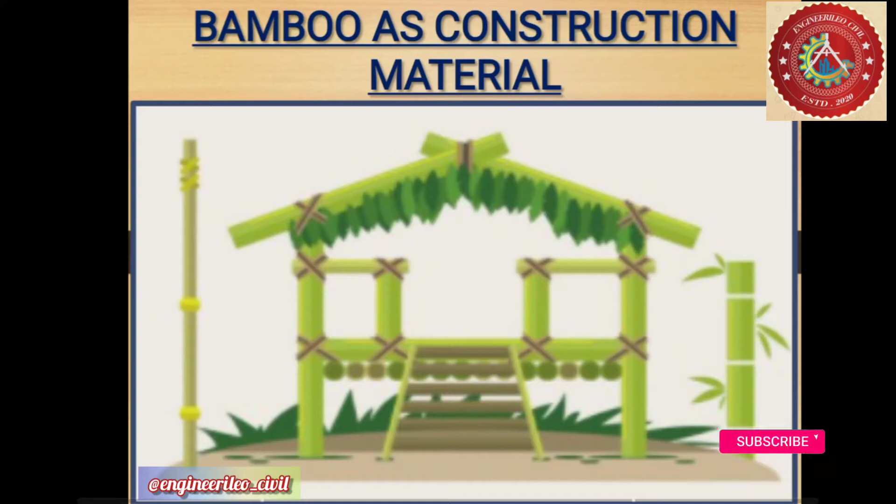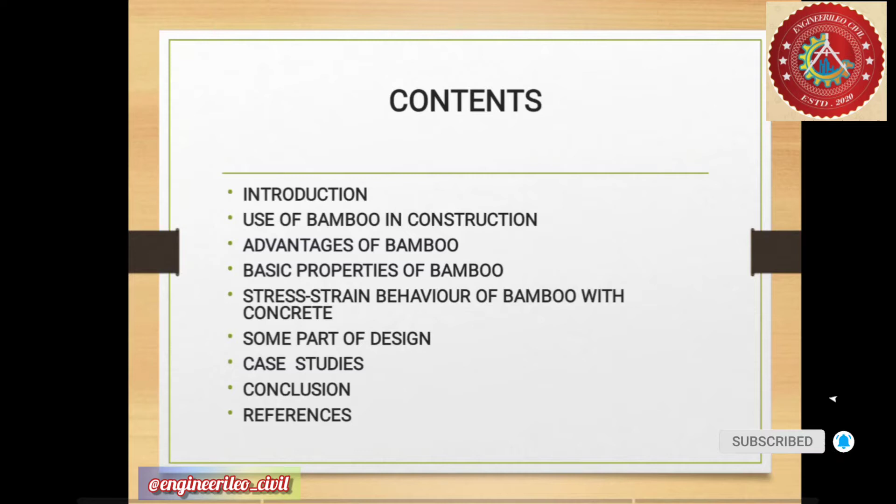So today's seminar topic, mini project topic, is bamboo as a construction material. We can use bamboo in our construction. There are many uses of bamboo, many advantages of bamboo, properties of bamboo. We'll learn about the stress strain behavior of bamboo with concrete, if we add concrete as well as bamboo in our construction. We'll see some part of design case studies, and finally we'll give the conclusion and the references from where we made this ppt.

Okay, so let's start with the introduction. Bamboo is a woody grass. It is the fastest growing woody plant in the world. Some species of bamboo grow so fast that you can almost see them growing. Bamboos are some of the fastest growing plants in the world. They are capable of growing 60 centimeters or more per day. However, the growth rate is dependent on local soil and climatic conditions.

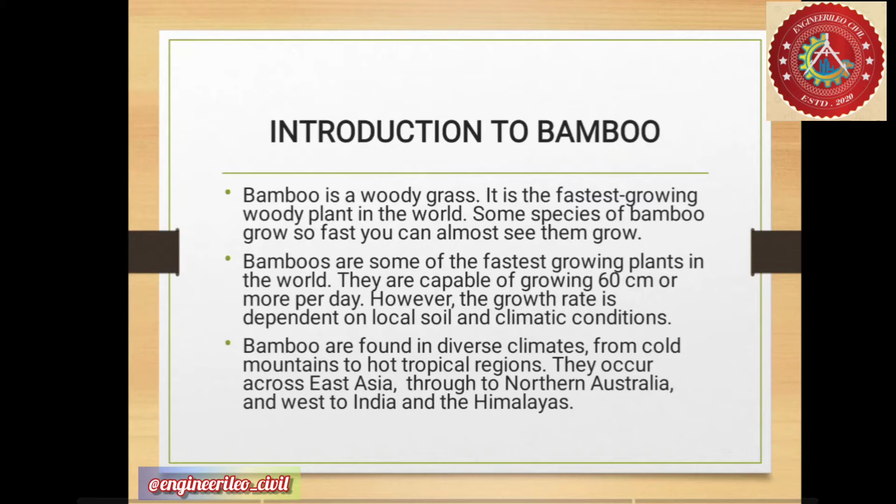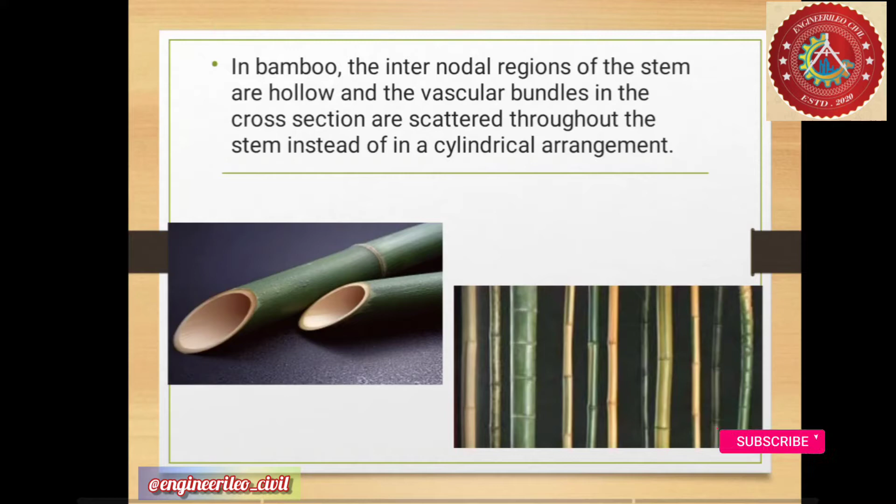Here you can see the bamboo resources in India. In the map, the dotted portions are the resources with different shapes. The triangles are the bamboos, and rectangles are the Dendrocalamus, Indocalamus, and so on. You can see it in Google also. The major bamboo growing states in India are the Northeast, Madhya Pradesh, Maharashtra, Orissa, Karnataka, Jharkhand, Kerala, UP, West Bengal. 45% of bamboo forest is in India, with 4.5 million tons produced annually from 8.96 million hectares.

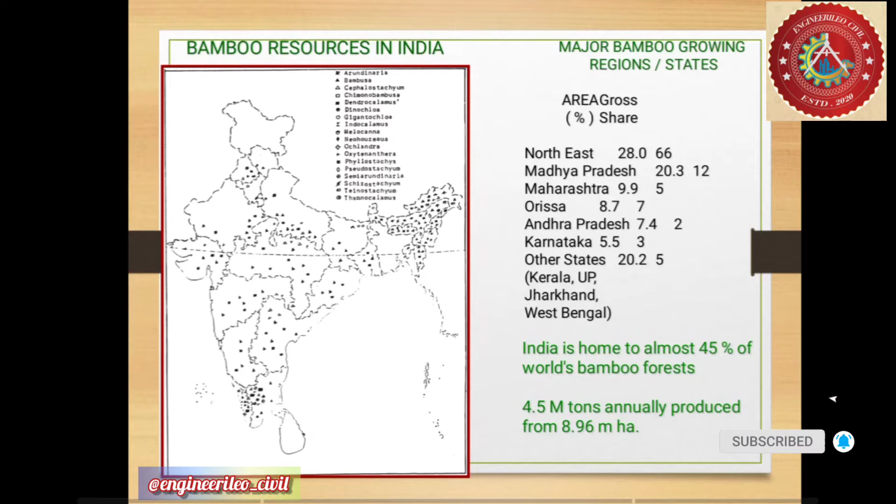Okay, so let's study the advantages of using bamboo. Some of the advantages are they are low cost, environmentally friendly, lightweight compared to steel, shock absorbing and earthquake resistant, use less fossil fuel, and prevent pollution by absorbing large amounts of nitrogen from wastewater and reducing the amount of carbon dioxide in air. And in tropical and subtropical regions, it is an abundant and economically advantageous material.

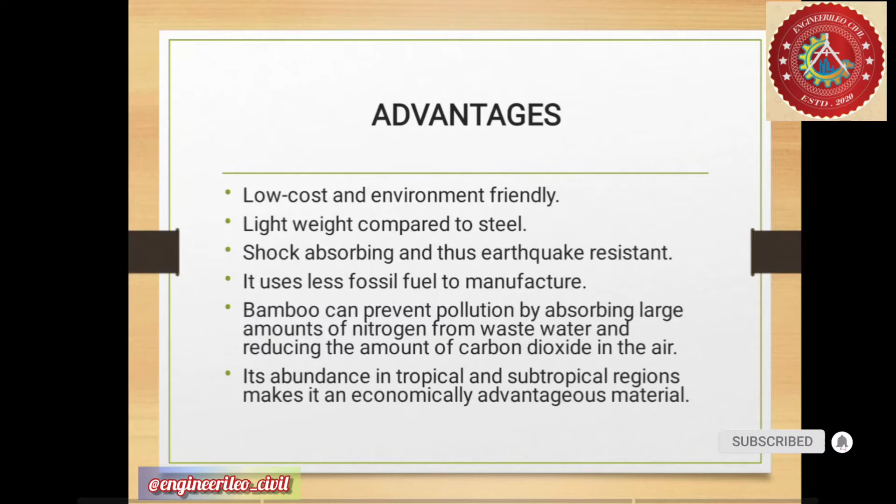Now we'll study the use of bamboo in construction. One use is in scaffolding. Do you know what scaffolding is? The arrangement made to construct slabs or for painting purposes. Bamboo is very essential and very economical for this. For reinforcement, we provide reinforcement bars in concrete columns. You can provide bamboo bars by filling the hollow surface with concrete.

For roofing purposes, you can see in village areas the bamboo is cut from the middle and the semicircular parts are kept as roofing. You can also construct walls, the partition walls, through bamboo. Doors and windows were constructed from bamboo in earlier ages.

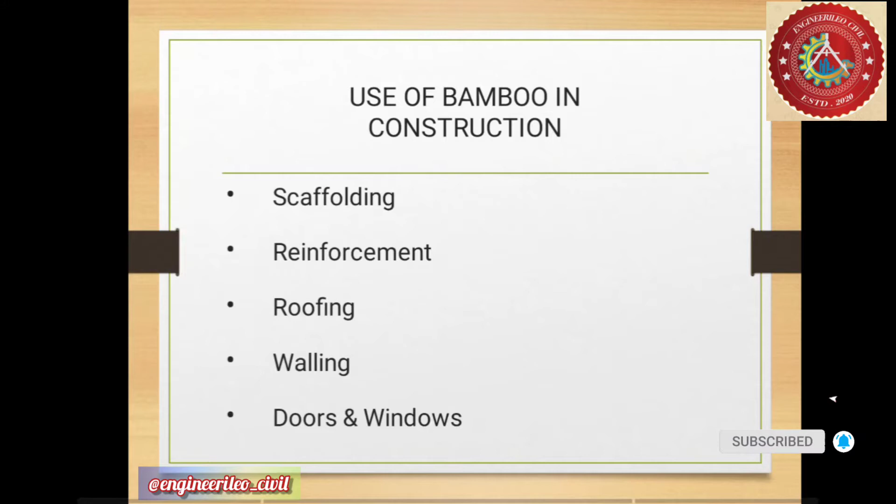So we'll study the basic properties of bamboo. First of all, we'll see the tensile strength and unit weight. The common tensile stress in steel reinforcement is 160 Newton per mm square, and that in bamboo is 370 Newton per mm square. Comparatively, the tensile stress is more in bamboo as compared to steel. The mass per volume of steel is 7850 kg per meter cube, whereas for bamboo it is 500 to 600 kg per meter cube. You can see that bamboo is much cheaper, much lighter, with far less weight than steel and more tensile strength.

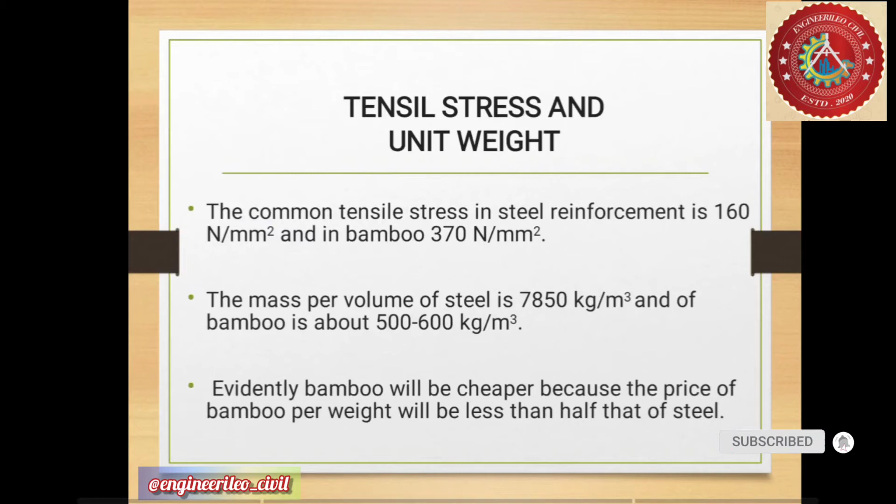Now we'll see the modulus of elasticity of bamboo. The fibers in bamboo act as reinforcement, similar to reinforcing steel bars. Distribution of fibers increases from inside to outside. The elastic modulus for cellulose is 70,000 Newton per mm square, and about 50% of the cross section of fiber is cellulose. So the elastic modulus of fiber is 35,000 Newton per mm square. In most bamboos, fibers constitute 60% on the outside and 10% on the inside.

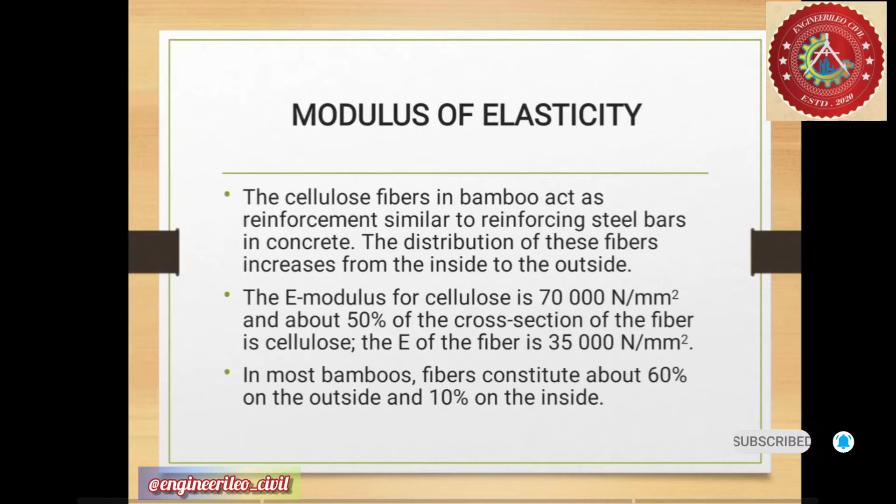The density of fibers in the cross section of a bamboo shell varies along its thickness. This presents a functionally gradient material evolved according to the state of stress distribution in its natural environment. You can see the diagram. The fibers are concentrated in regions closer to the outer skin.

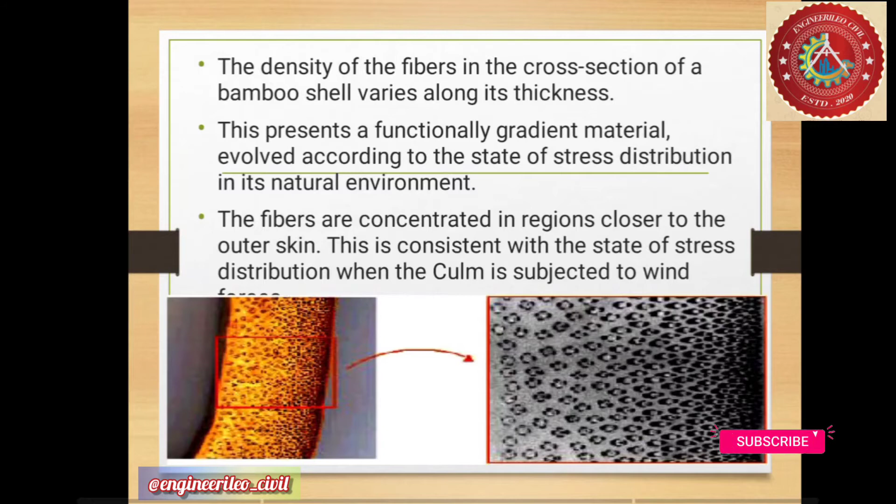This is consistent with the state of stress distribution when the culm is subjected to wind forces. Now we'll see some of the durability part of bamboo. Bamboo with low humidity is less prone to mold attacks, especially when humidity content is less than 15%. You may see that during construction of bamboo, there might be attack of fungus or something else, because it's a wood material, it's a plant material, right?

So physical and mechanical properties of bamboo increase with the decrease in humidity content, and bamboo to be treated with preservative needs to be dry to facilitate penetration. Because of the action of water or humidity, there might be attack of fungus, so we have to keep the bamboo in dry state. Bamboo can be dried in air, greenhouse, and oven, or by fire.

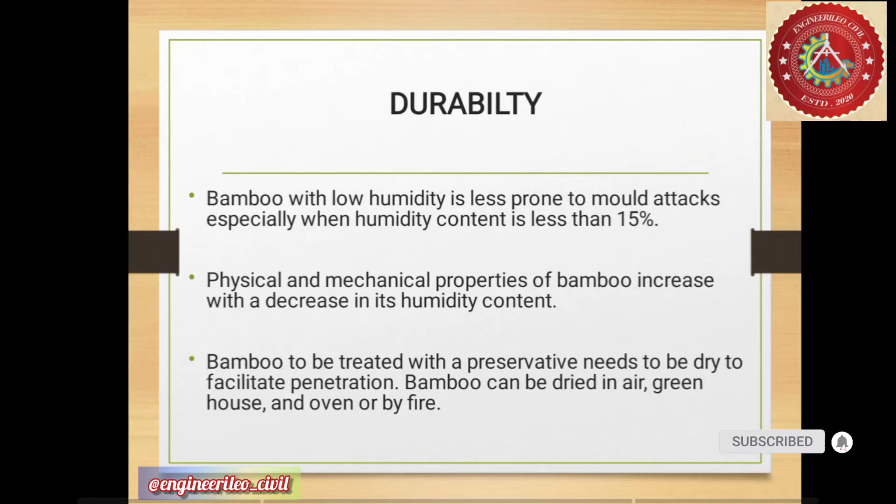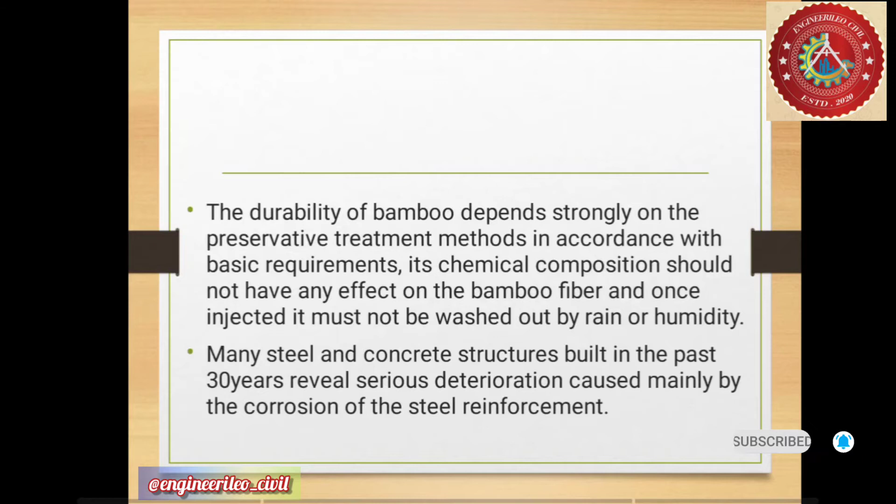It could be dried. Okay, the many steel and concrete structures built in the past 30 years reveal serious deterioration caused because of corrosion of steel reinforcement. That's why bamboo is more preferable. So we'll study about the process of preservation of bamboo. According to IS 401-2001 Code of Practice of Preservation of Timber, first is the surface application.

What we do in surface application, we'll brush it, we'll dip it in some paint or grease, such that because of water, the fungus could not attack it. Like hot and cold method, diffusion process, internodal injection, whatever.

So here in that process, first is the tank containing preservative located at high level. Second, the tank connecting the pipework. Third, the pipework has been distributed in various parts. Fourth, the different pipes or the sub pipes are controlled by the valve and with the tube clamp, and then with the help of flexible rubber tubing, the bamboos are wax plugged. Okay.

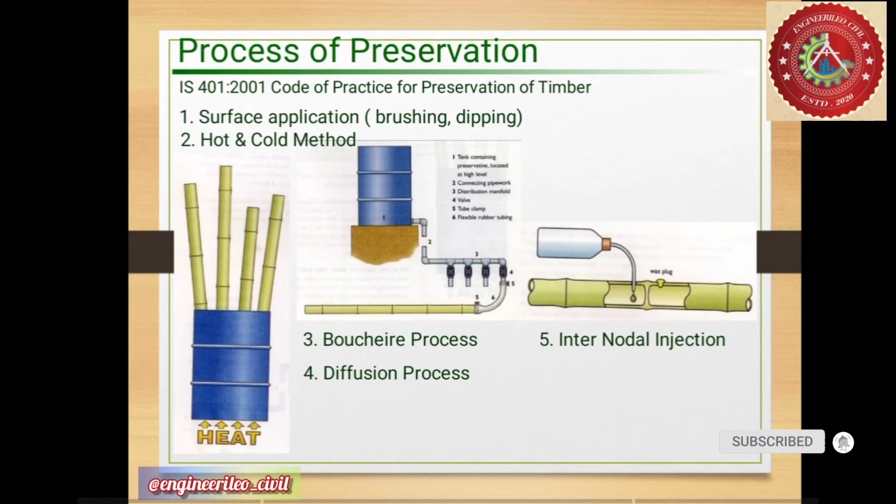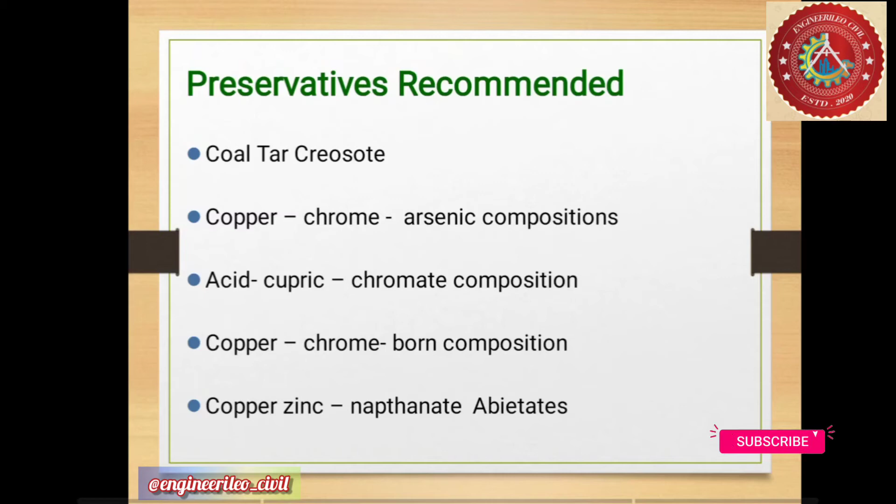So now we'll see the preservatives recommendations. We can add preservatives where you dip preservatives like coal tar or copper chrome, acid cupric, copper chrome boron composition, copper chrome arsenic composition, copper zinc naphthenate. Okay, here you can see the table of physical and mechanical properties of Indian bamboos.

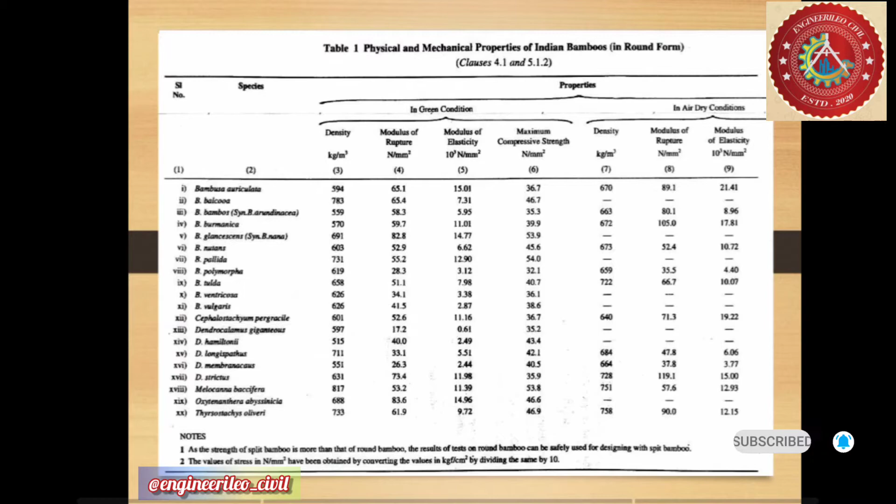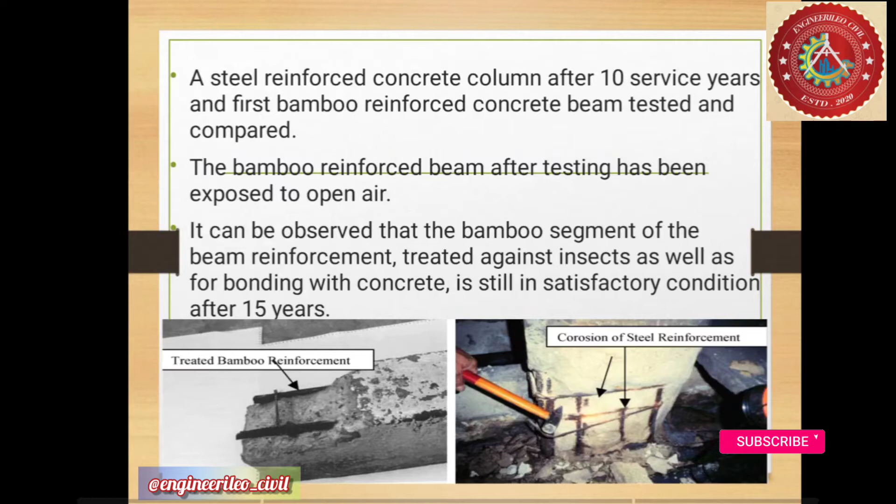In that diagram, you can see that a steel reinforced concrete column after 10 service years and a bamboo reinforced beam after being tested are compared. Okay, right. So you can see the diagram comparison. Now we'll learn about the earthquake resistance part.

As said earlier, bamboo is a perfect material for earthquakes. Its lightweight and hollow form gives much stiffness. But some can ask how to assess whether a bamboo house would survive an earthquake of a given intensity. But for that, a dynamic test on a full scale house is extremely expensive. So at the National Bamboo Project of Costa Rica, only typical walls are tested using a static test.

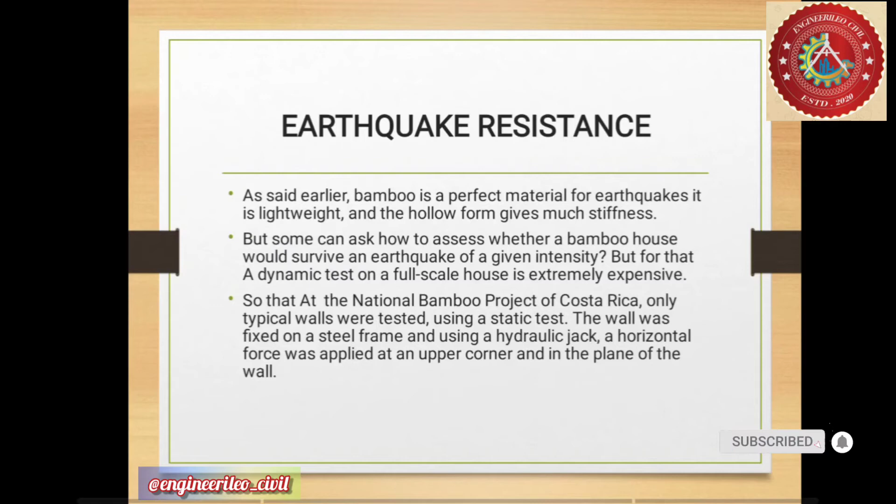A wall was fixed on a steel frame and using a hydraulic jack, a horizontal force was applied at the upper corner and in the plane of the wall. Right? Here you can see the diagram of that thing. A panel made of split bamboo. The hydraulic jack, which applies horizontal force, can be seen at the top right corner of the frame. This jack simulates the effect of earthquake.

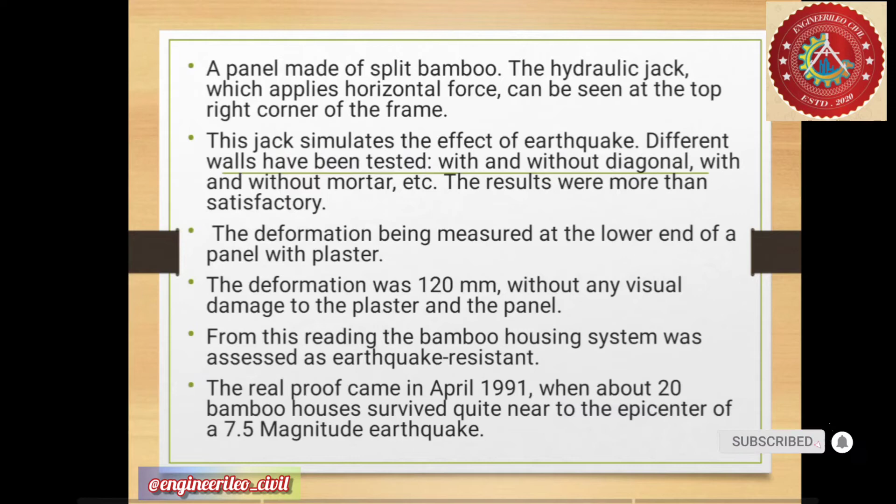Different walls have been tested with or without diagonal, with or without mortar, or any other cases. The results were more than satisfactory. The deformation was measured at the lower end of a panel with plaster. The deformation was 120 mm without any visual damage of the plaster panel. From this reading, the bamboo housing system was assessed for earthquake resistance. The real proof came in April 1991 when about 20 bamboo houses survived a nearby 7.5 magnitude earthquake.

Now we'll study about seismic reinforcement. The most important factor for the improved seismic performance of adobe construction is to provide reinforcement for walls. The role of reinforcement therefore is to keep these large pieces of adobe wall together. The ring beam must be strong, continuous and well tied to the walls, and it must receive and support the roof. The ring beam can be made of concrete or timber.

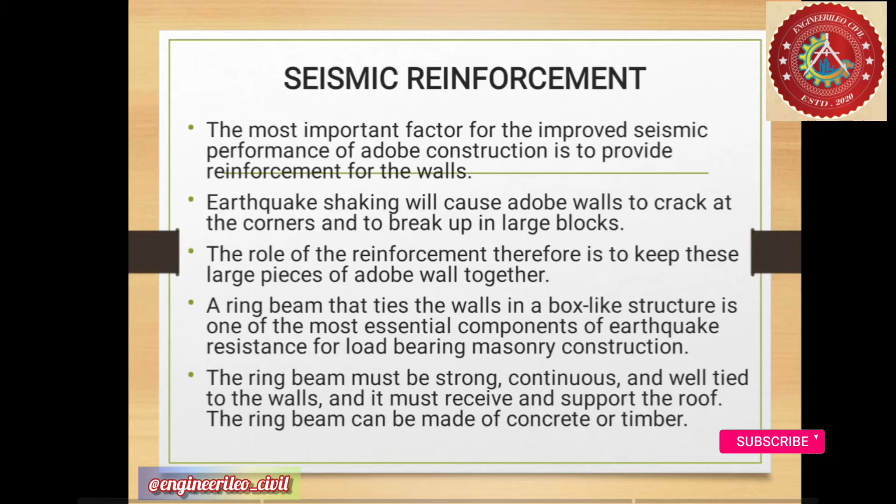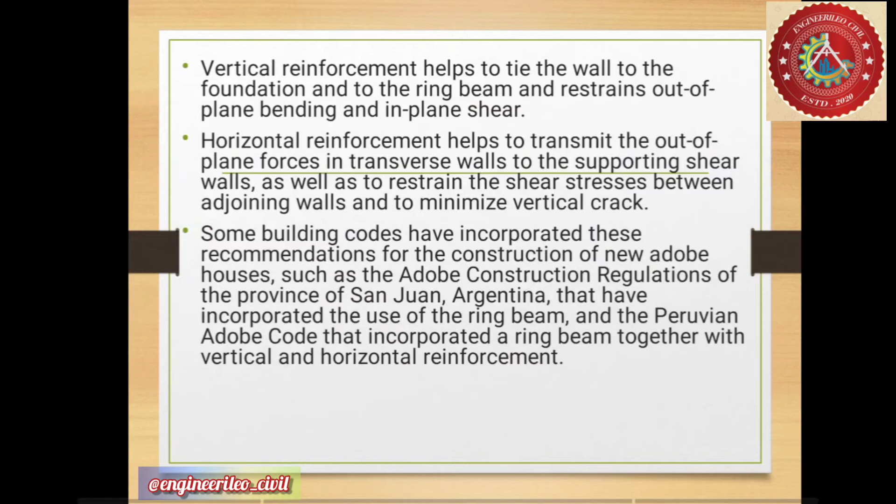Horizontal reinforcement helps to transmit the out-of-plane forces in transverse walls to the supporting shear walls, as well as to restrain the shear stresses between adjoining walls, and minimizes vertical cracks.

Here capital D, small d and b are the total depth, effective depth and width of the bending element respectively. ABT is the area of bamboo subjected to tension. EC and FC are the compressive strain and stress of the concrete. EBT and FBT are the tensile strain and stress in bamboo. In stage 1, for a small load, the stresses and strains are in the linear elastic range.

In stage 2, with the increase of applied load, the stress diagram in the compressive zone of concrete becomes non-linear before its ultimate strength FCU, and bamboo in tension starts to break from its extreme lower layer, hence starting the third stage. In the third stage, the diagram of the compression zone of concrete is of parabolic shape. However, for the development of formulas for practical design, a rectangular shape is adopted.

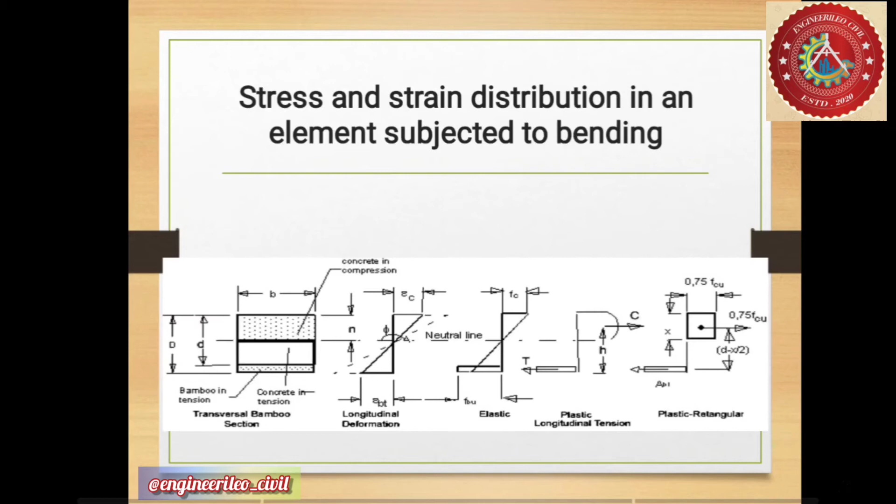Now we can see the replacement of mud or brick walls with bamboo reinforced concrete panels. In the diagram you can see that bamboo meshes are used as reinforcement material in concrete. The use of bamboo mesh panels as walls makes the structure economical, shock proof and environmentally friendly.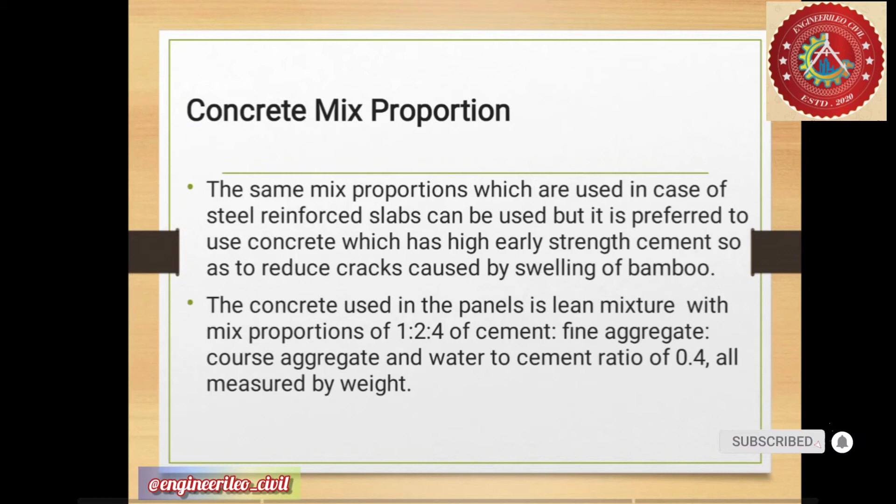Bamboo framework. The bamboo used in the panels was allowed to dry for 2 or 3 weeks. The framework of bamboo strips is constructed by cross-linking the strips. To avoid swelling of bamboo strips, a thin coating of asphalt is applied. This bamboo framework can also be bought from the market as it is readily available.

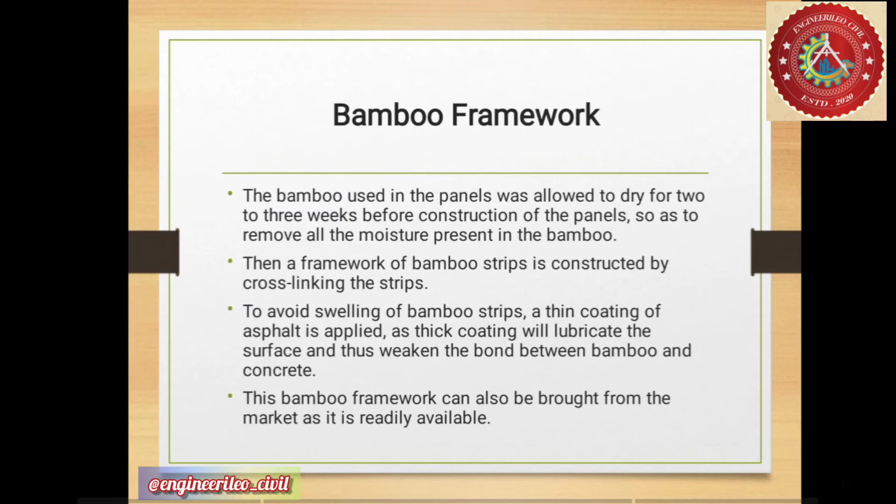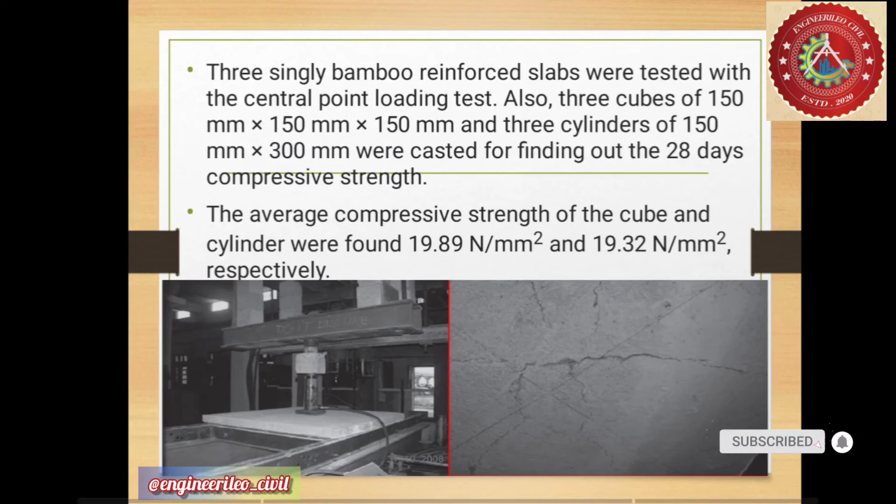3 singly bamboo reinforced slabs were tested with the central point loading test, along with 3 cubes of these dimensions cast for finding the 28 days compressive strength. The average compressive strength of cube and cylinder were found as 19.89 N/mm² and 19.32 N/mm² respectively. This graph shows the collapse loads of the first, second and third slabs, found as 453 kg, 352 kg and 341 kg respectively.

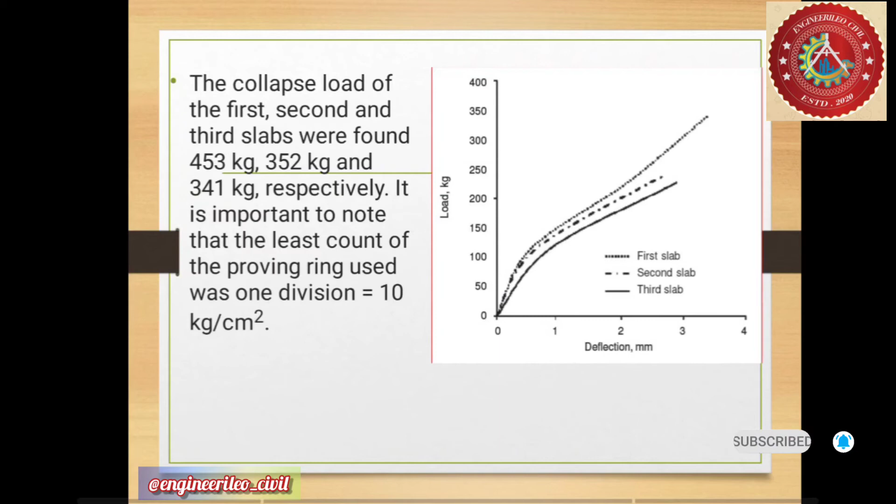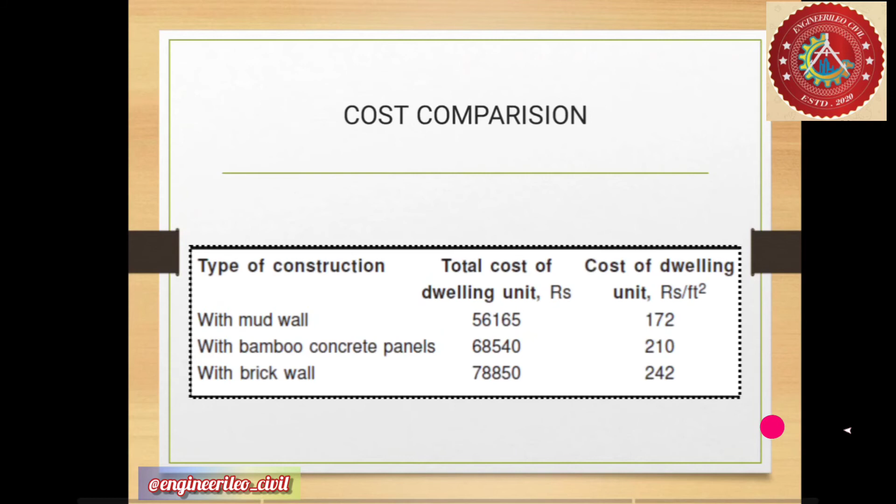It is important to note that the least count of the proving ring used was 1 division = 10 kg/cm². The cost comparison of mud wall, bamboo concrete panels and brick wall is as follows. The study concludes that the strength of bamboo concrete panels is quite higher than mud walls, and use of bamboo is highly recommended in flood prone areas because of its light weight. The bamboo concrete panels are much more durable.

The initial cost of bamboo concrete is higher, but the maintenance cost is lower compared to mud walls. The construction of bamboo panels does not require much skill and can be done easily.

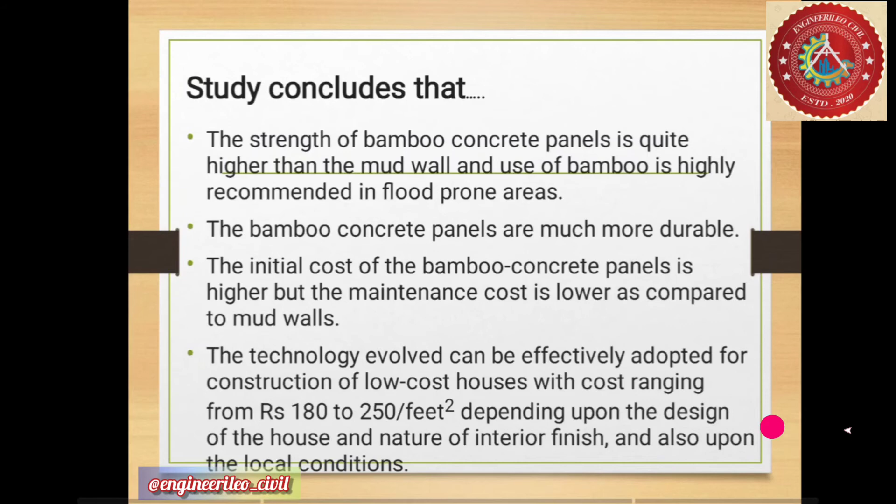Mud walls get washed away in cases of floods, which does not happen in case of bamboo reinforced concrete walls. Asphalt coating on the bamboo mat and sand spraying increases the bond between concrete and bamboo.

Some of the design parameters are concrete mix. The same mix design can be used as would normally be used for steel reinforced concrete. The concrete slump should be as low as workability will allow.

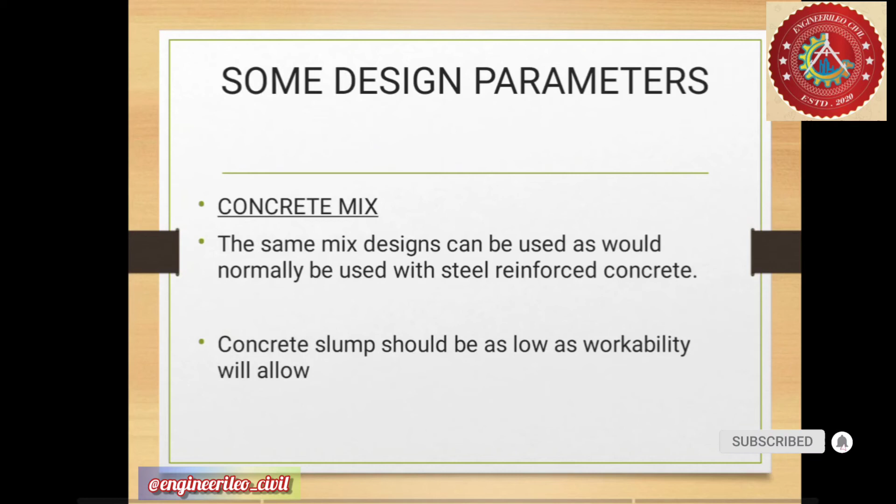Some of the other design parameters are spacing of bamboo. Bamboo reinforcement should not be placed less than 1.5 inches from the face of the concrete surface. The clear spacing between bamboo rods should not be less than 1.4 inches. The reinforcements should be evenly spaced and lashed together on short sticks placed at right angles to the main reinforcement.

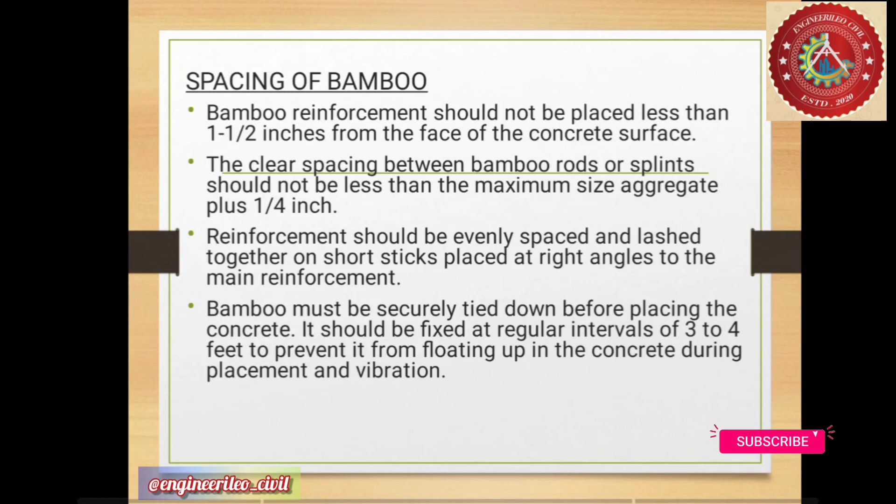The other characteristic value is the material property, represented by a 5 percentile property estimated from test results obtained as in DIS 22157.

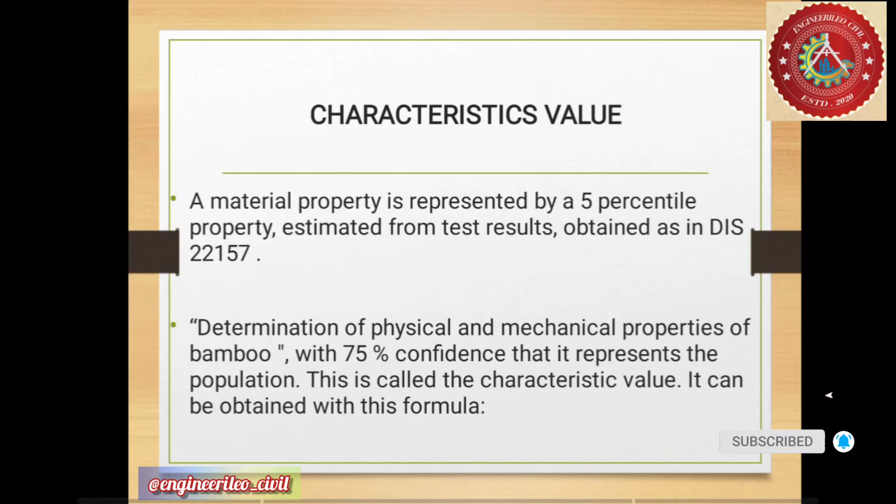The definition for characteristic value is the 75% confidence of the physical and mechanical properties. It can be obtained by the formula shown on the page, where Rk is the characteristic value, R 0.05 is the 5 percentile from the test data, M represents the mean value for the test data, S represents the standard deviation, and N is the number of tests.

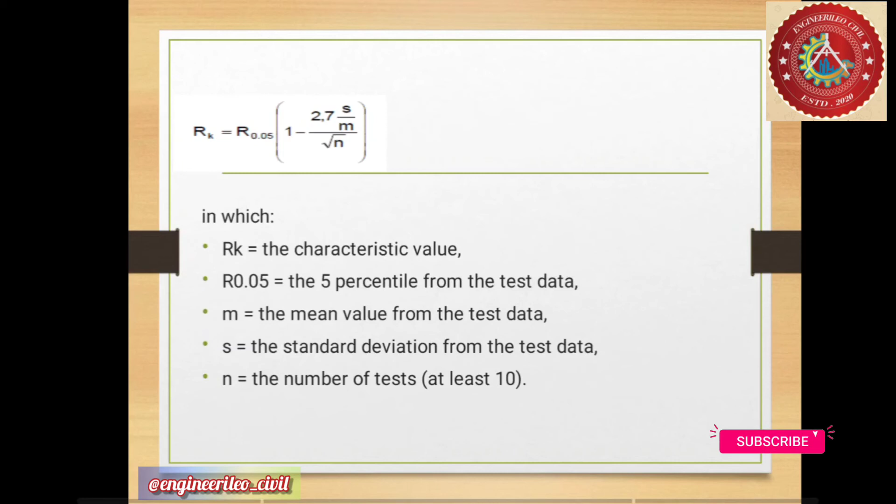So these are the allowable stresses, with the formula sigma equals Rk into G into D upon S. Instead of the limit state design procedure, allowable stress design can be adopted, and the allowable stress can be derived from test results, where sigma, Rk, G, D represent allowable stress, characteristic value, modification factor, and duration of load.

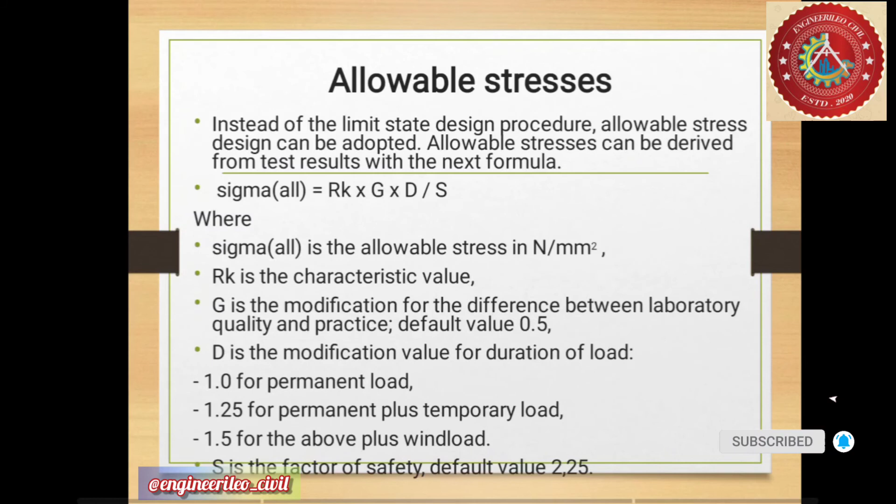These are some photographs of the arrangement of bamboo. You can see in these photographs the bamboos are cut from the middle and arranged. The diaphragm is added for giving more support. Half of the bamboo culm is cut from the middle, and the other half is concrete.

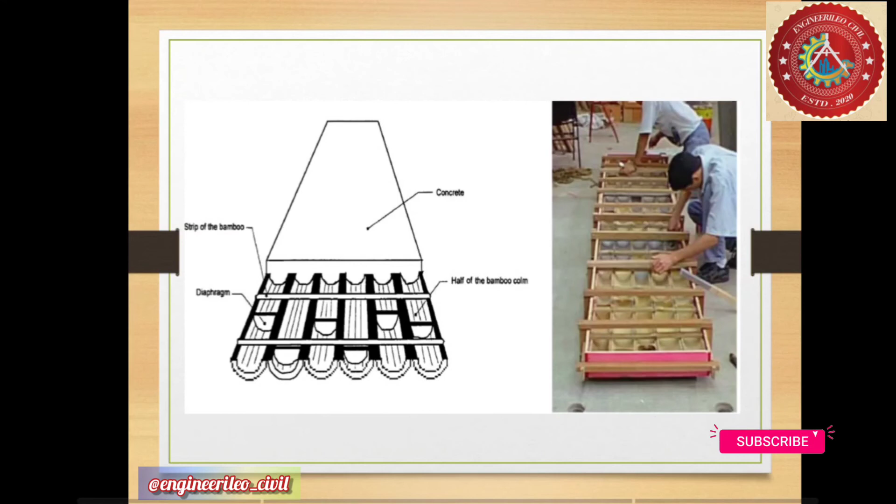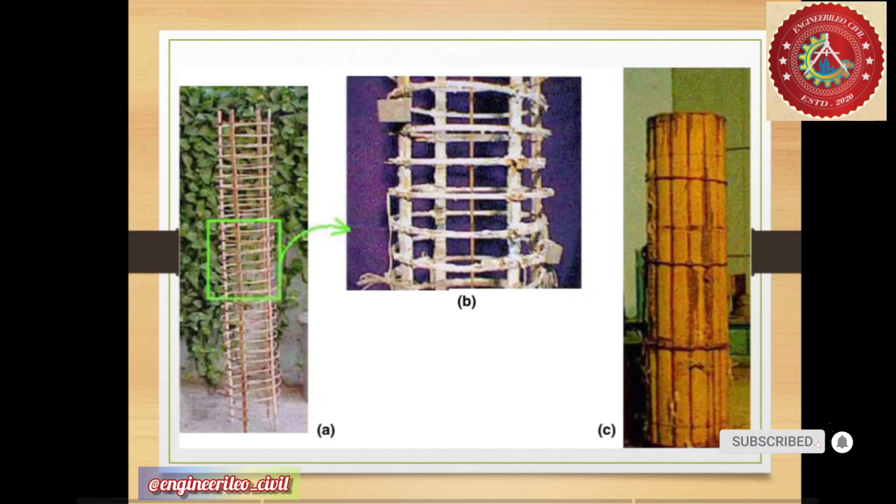And the strips of bamboo are applied. You can see the detailed diagram, and here you are seeing the meshes of the bamboo.

Now, according to Indian standards, these are some standards for bamboo and bamboo products. You can see IS 14588, IS 1902, IS 8242, or 6874 for different code practices, like for preservation of bamboo or structural purposes.

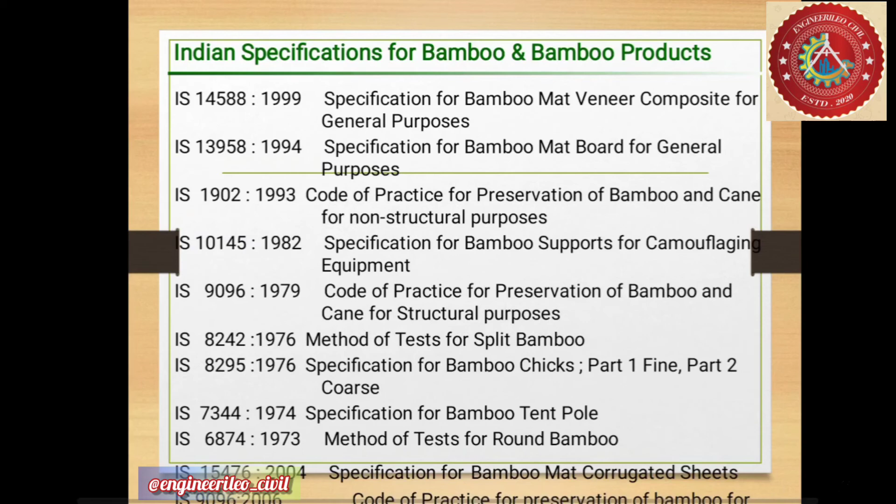Finally, we are going to see the application of bamboo in various projects. First of all, in construction of demonstration structures using bamboo materials in Mizoram and Tripura. Salient features of this structure are its bamboo posts, bamboo grid, ferrocement walls, bamboo trusses and purlins, bamboo mat.

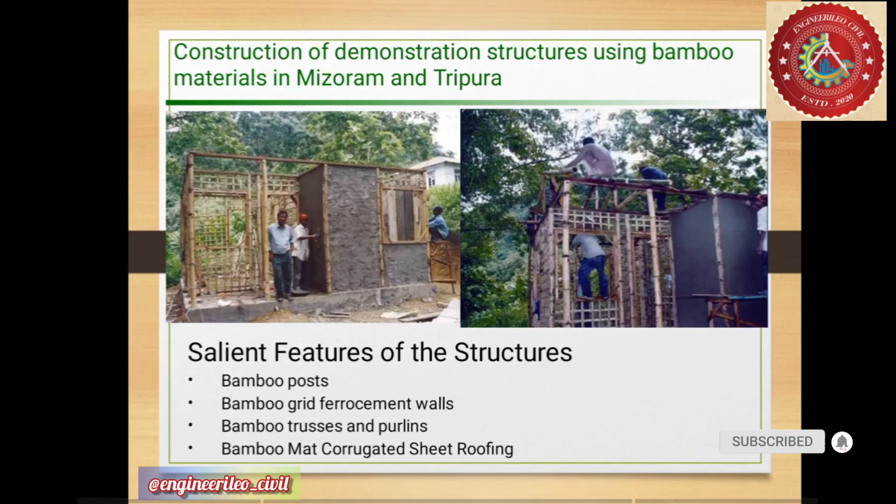Corrugated sheet roofing. Some other examples are in Kerala Forest Research Institute, Nilambur, where you can see the complex showing 3 buildings of different category applications, like a residential building, an office, and a medium rise. The buildings are constructed of bamboo.

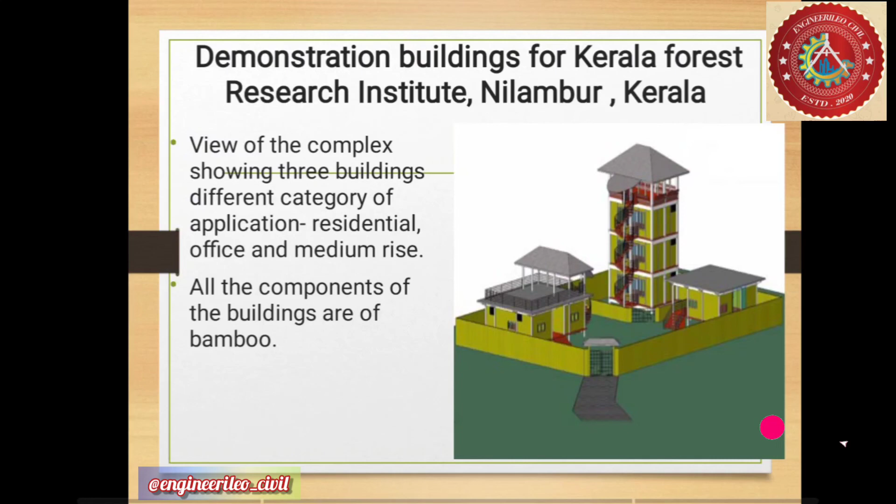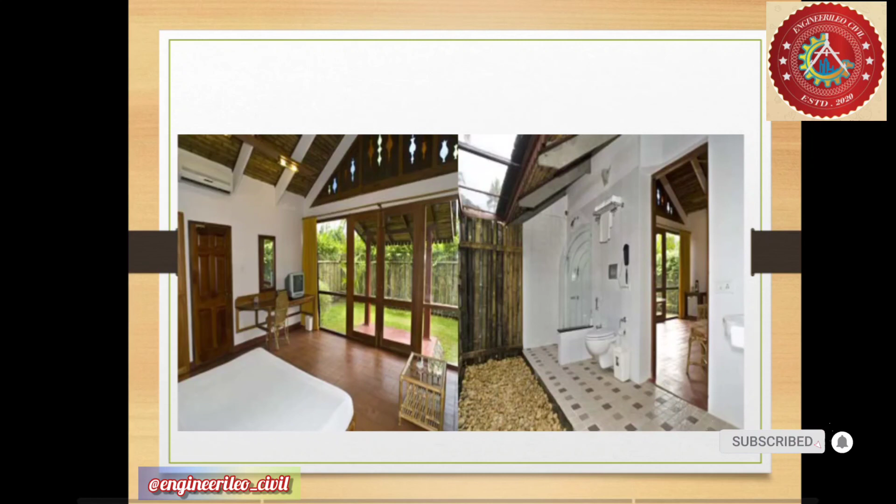The third example is the Whispering Palms holiday resort for Abad group of hotels at Kumarakom. The resort from inside. These are the premises in Cochin, Kerala. Front view of that premises.

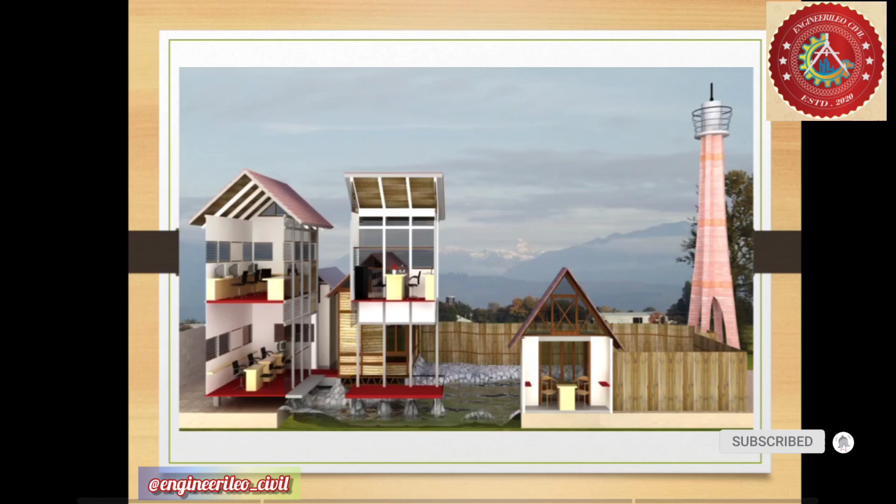These are some of the information about that premises, that it covers 2750 square feet, and bamboo is used in combination with RCC columns. You can read that information.

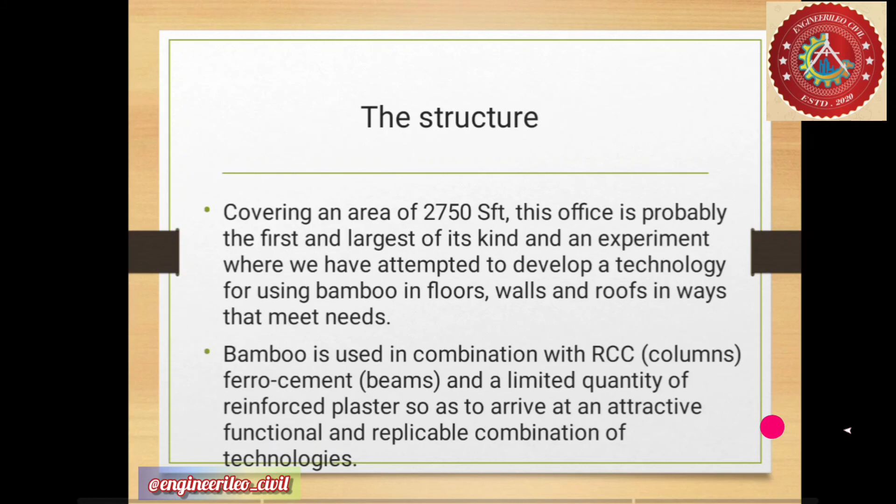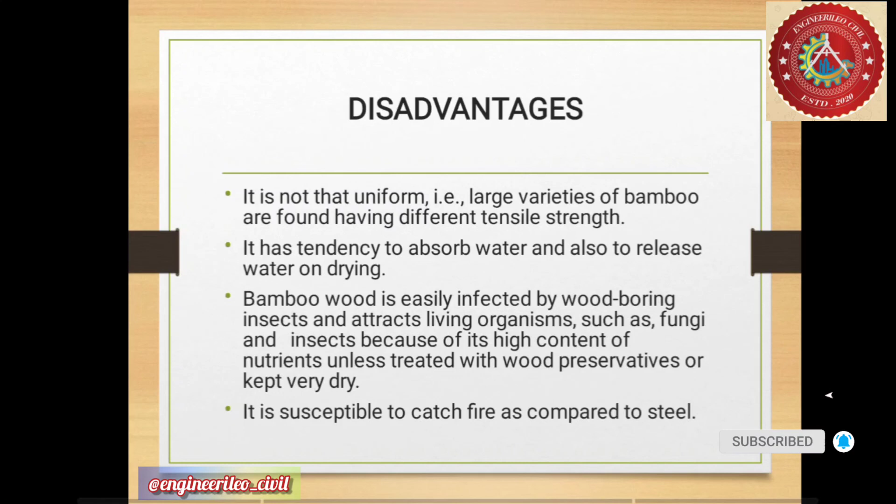Now I'm going to tell you about the disadvantages of bamboo. It is not uniform. Large varieties of bamboo are found with different tensile strength. Like steel has a conformed fixed tensile strength, Fe415, Fe500, bamboo has large variety with different tensile strength. It has the tendency to absorb water, also to release water on drying, and it is susceptible to catching fire as compared to steel.

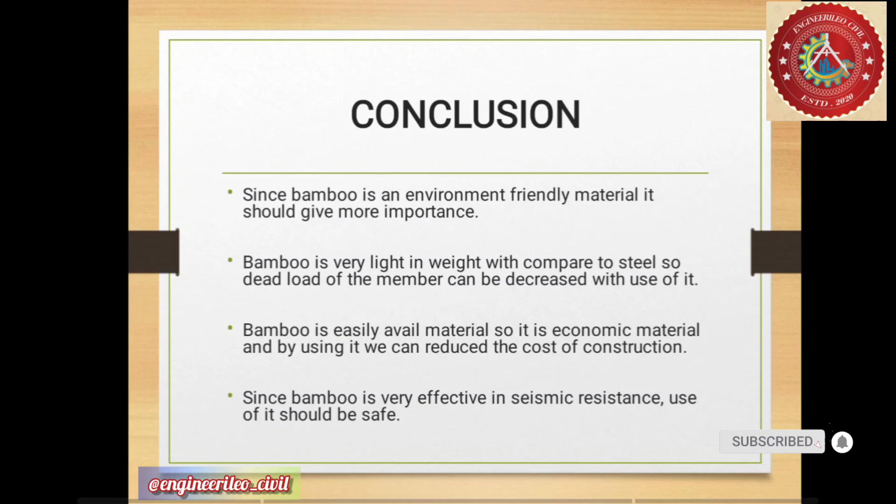Finally, we have reached a conclusion: bamboo is an eco-friendly material, and it should be given more importance. Bamboo is very light in weight compared to steel, so the dead load is very less, and we can use it. Bamboo can easily avail material, so it's an economic material, and by using it we can reduce the cost of construction. Since bamboo is very effective in seismic resistance use, it should be safe.